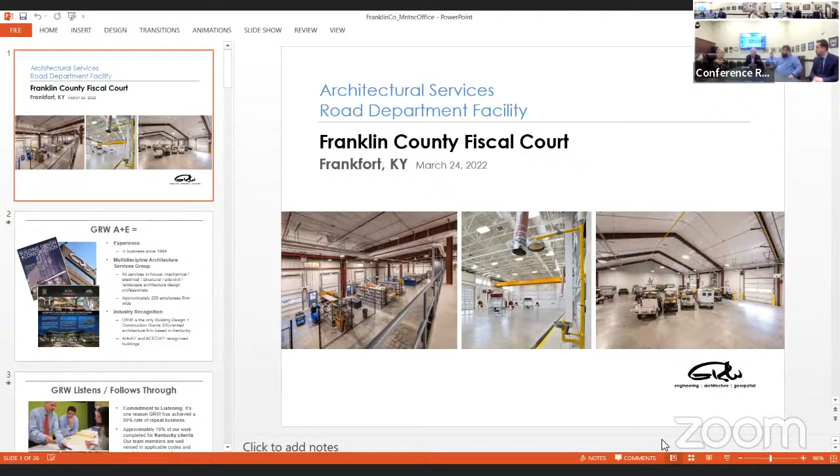I was wondering about that. Since that time, I guess they started out with about 5 staff members, and since then we have grown into a company of over 200 folks, with right around 100 people at the Lexington office at this time. I joined the firm in 2006, and we've been growing the architecture department since then. As I indicated earlier, Tim is surveying, so we have all the engineering disciplines in-house: site civil, structural, mechanical, electrical, surveying.

We also have water resources, which is wastewater and water projects. We have a number of satellite offices, but Lexington is the main office.

Okay, so we now have it up, and this project is a new design of a new road department. What's unique about this, and I'm sure you're aware, but I'll say this for the public as well, is that it's designed, and then we all have a construction manager, but we'll also be having to operate out of the facilities as we're building new facilities on site. So the logistics is going to be part of the issue we're going to have to confront and work with during this time.

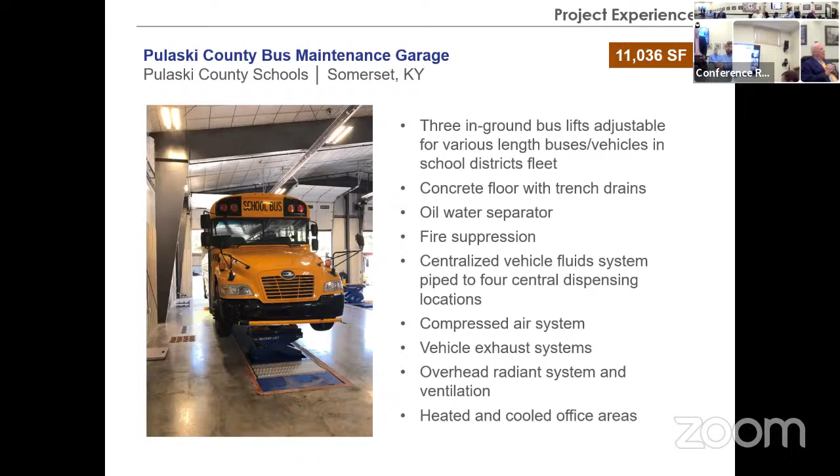Does this particular building have an administration building connected to it? I'll go to that slide, because I have the floor plan. This particular building had several storage rooms on the side, I think a tire room and a parts room. It had a work room where they were doing other tasks away from the buses. You had a waiting area for the bus drivers bringing the bus, and then an office and a restroom.

And then some of the equipment was coming from their existing facility, like the waste oil tank. So we were also coordinating existing equipment that needed to come to the building. The reason I put this slide in the presentation is I just wanted to talk about how we coordinate the drainage of the slab inside the work area.

Our goal was, one, you want to keep water away from the pits where the bus lifts are, so we want to drain away from those. And we have to be level enough that the bus gets onto the lift properly, so it's not too much of a slope. And then we want to minimize the linear feet of trench drain.

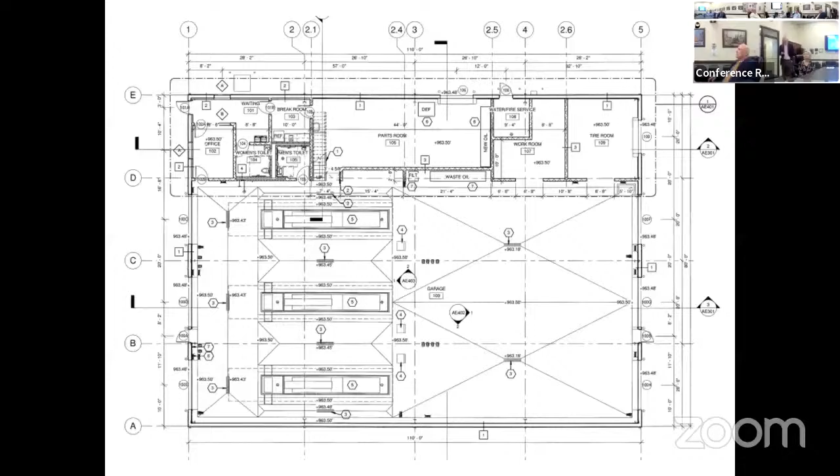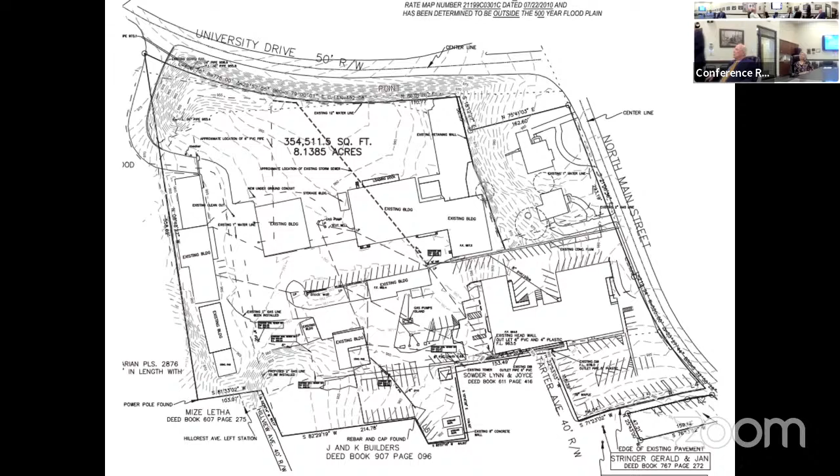So I had these site plans in there. This was the site when we received it. You have multiple buildings. This was their board administration building. But basically, they got this site from the local electric co-op that moved to another facility, and they bought this.

And so all these buildings were existing. They were interested in saving these buildings for their maintenance facilities, storage and distribution. They're interested in using this building as their board building and staff offices. And so we were given roughly this area of the site. So you had several buildings, you had existing tanks, and that was kind of the starting point of the survey.

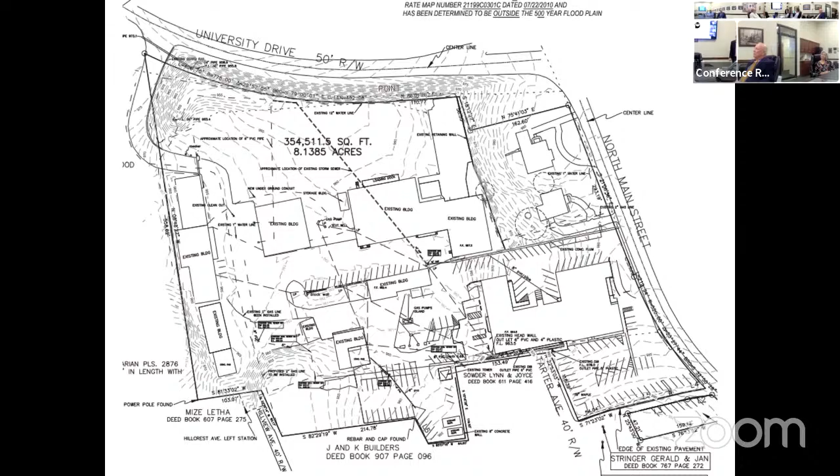So what we ended up proposing was putting it here. You're seeing where we are patching, repairing, or blacktopping areas that are currently gravel or need to be repaired in gravel. And then we packaged an alternate for the bus parking lot, which was gravel at the time, for this area, because they wanted to make sure that their bids came in so they at least got a project where they got the building.

So there, in one of the bays of this existing back building, was an existing wash bay. So we did not have to include a wash bay in our building or in our design.

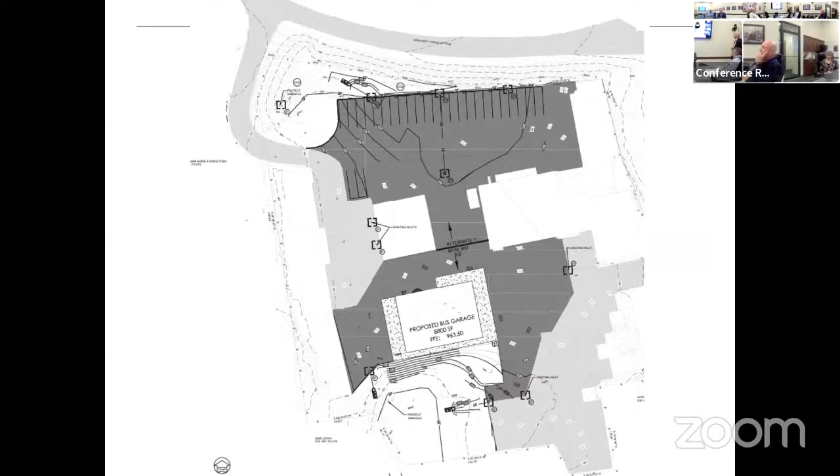Do you have a slide that shows those lifts with nothing on them? Do they go down into the floor? They are flush with the floor, except for one of the axles to make sure the bus is in the right position. It rolls into some cups that recess into the slab.

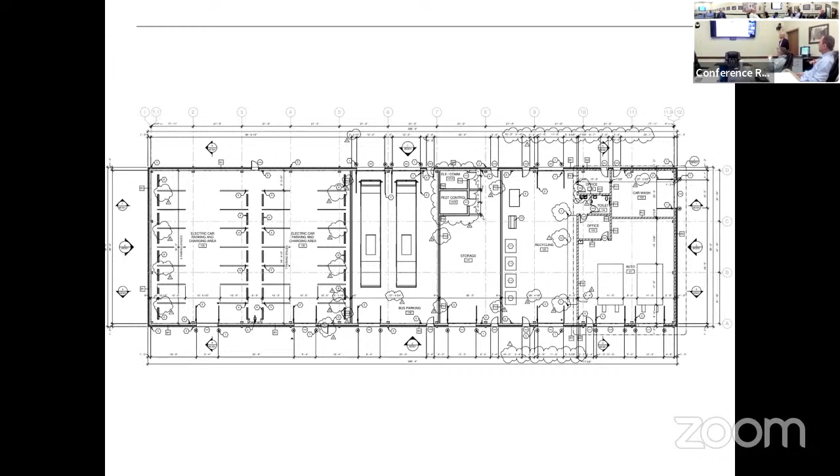They don't really maintenance them in there, but that's where they park. They have their fleet maintenance area here, and we coordinated the installation, or the reinstallation, of their existing lifts there. They do have a car wash for their campus vehicles, storage, and then this area is dedicated all to recycling — there's a compactor and a shredder. So that's how that building lays out.

One of the key envelope issues on these types of buildings is the R value of the overhead doors and the seals around the overhead doors. So we work very consciously when we spec those, when we draw the jamb and head details, to make sure we're getting good seals and a door with a good R value, because it's a major part of your envelope on these types of buildings.

Do you use fans in these types of buildings to move heat? It ended up being high volume, low velocity, or 'big ass fans,' that were utilized in this space. But you don't have to use the big foil fans like that.

You can also use something that's just for air circulation that are very small and kind of disappear. There were some areas we used those, called Air Pears. You get the same effect where it circulates the air, but they don't get in the way of what might be up in your ceiling. You all look at that as part of your design, how to circulate air.

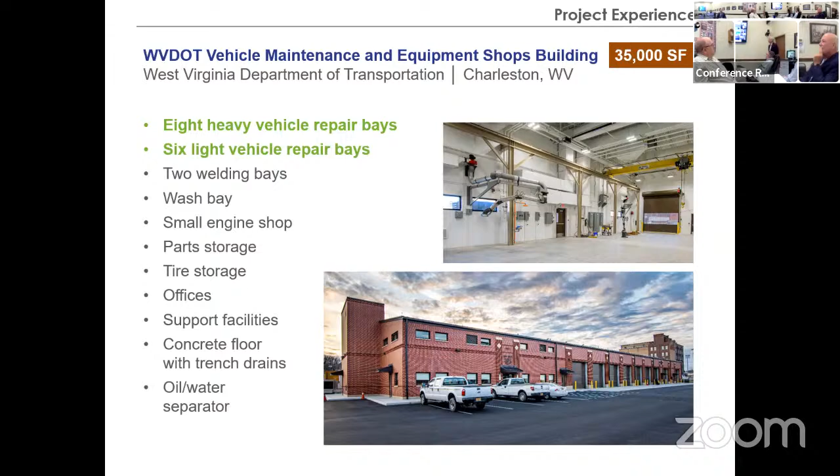And then this field maintenance shop for Army Guard and Reserves - you can see the hose reels for the exhaust system where they take them to the exhaust pipe.

This is your POL delivery system, your lubricants and other fluids. So you have cubes that are in an area by themselves. We have a trench system where the piping comes throughout the building - you can access the pipe to maintain it. It comes to these stations, and there's a reel for each liquid you're using. I think there's also waste, so it will take the waste back to a holding tank. So if you want that type of system in your building, we have designed that.

Does that trench also incorporate floor drainage? No, that is just for the POL system.

This particular project, they were pretty adamant about trench drains at the doors.

When you design these type of structures, do you put skylights in? Is that not useful? We have done it. Usually the reason we do a skylight is on a treatment plant, and they want to be able to remove a large tank or a large piece of equipment to maintenance it in the future. So they can take the skylight off, set it over, and crane that out.

This is an example of a small municipality where we needed to hit a very tight budget for a volunteer fire station. If you don't mind, one thing we haven't talked about, and several people on the screen have asked in other interviews, is about the flooring - what do you put down for non-skid, slippery floors?

Well, there's a fine line there between cleanability and non-slip. I know that Robert mentioned epoxy - being architects that support water resources engineers on water and wastewater plants, we are very familiar with the different epoxies. We typically specify around 3 manufacturers, and you can put additives in those for non-slip or slip resistance. Then you can finish your slab with the large trowel machines and get your control joints cut properly, and come back and finish the surface when all of the dirty work is done with the epoxy.

Typically, when we're specifying flooring or paint or floor coatings, we are going to meet the requirements of slip resistance put out there by folks like the ADA and other periodicals that we have. Are there techniques other than adding an aggregate or chemical applications? Well, there are ways - John, you can chime in if you know of anything I'm leaving out - but there are multiple ways to do it.

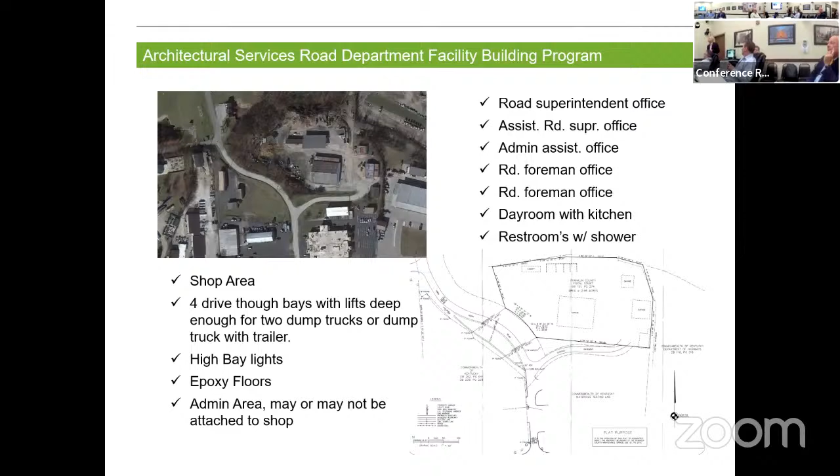So we had put this in with our proposal. I know that the goal for you all is to get under construction and get the project done as quickly as possible. And I think you will not find a better team that can do that, just because we have all the in-house engineering, we have in-house surveying, we have special inspections lined up that could also do geotech. So I don't know.

That this was set up to, I guess, beginning of March. Obviously, we're not going to begin at the beginning of March, but this was just a draft of what we thought.

So 3 months from schematic design to bidding. Is that accurate? If we get all the decisions made in a timely manner as we go through the project. And then I see 3 owner review periods.

Are you giving us what, a week, 10 days on that? That looks like about a week. Okay, yeah, 10 days, but sometimes there's weekends and whatnot. Sure, I mean, we would adjust it to specifically when the project started and how much time you thought you would need and physically need.

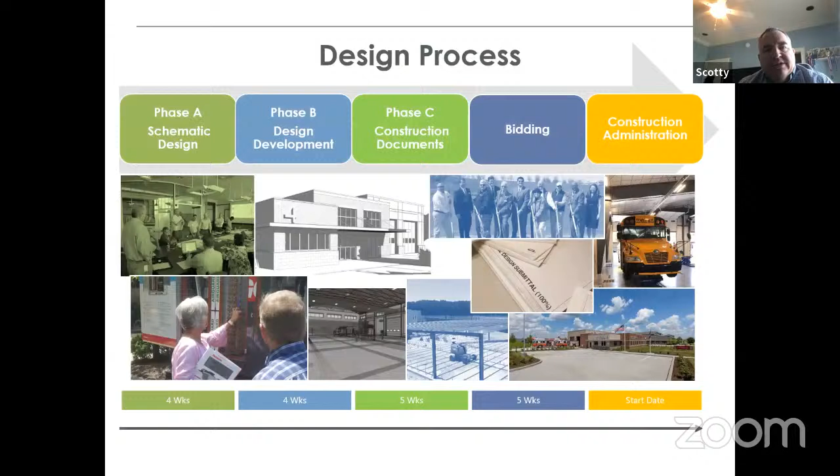Okay, will you explain your billing percentages and the process for the architect fee? Yes, sir.

Typically it is 20% of the fee for schematic design. Are you talking about the breakdown of the fee or actual percentage of fee? Yeah, the breakdown of it and your billing cycles per se.

So we would typically bill monthly. We do have some contracts where the owner wants us to bill at each stage of design, like schematic design, design development, construction documents. Typically it's 20% for SD, schematic design, 20% for DD, design development, and then 35 or 40% for construction documents, 5% for bidding, and the rest for construction administration. But we can set it, we're not locked in.

We're flexible as far as what - we work from many percentage of construction cost fee schedules. Kentucky Department of Education has one, the State Division of Engineering has one. For Berea, we work off of the KDE fee schedule. There's a rural development fee schedule we're doing a project on right now. So we can share those percentage fee schedules with you. Typically those include basic architecture and engineering.

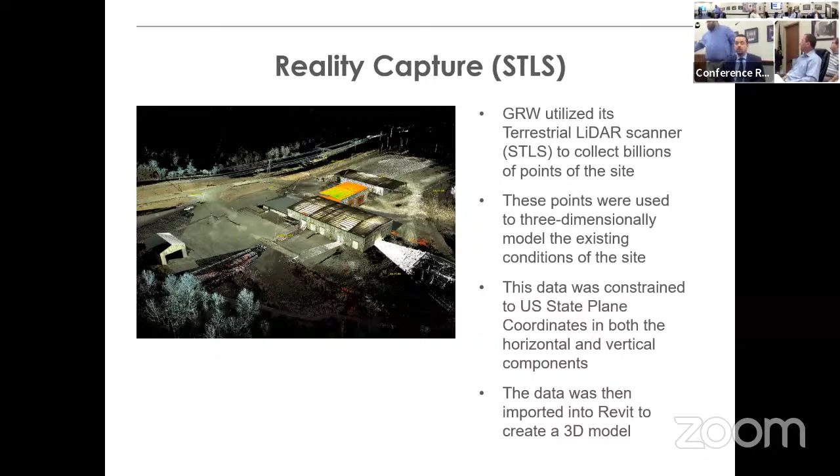One more question—those overhead cranes, do they run as much as the floor lifts, or more?

They're probably more by the time you add in the structural support that you need. I noticed in that picture, they had one on rails.

Thank you. Could I get my USB for this? You guys have a great day. Thank you so much, great, good to see you. Good to see you again. Thank you, sir. Good to meet you again. Good to see you again.

Thank you, Judge. Appreciate it. Good job. Appreciate it.

Andrew, you can go. Well, no, you might as well hang on. Cut everything off. Thanks, okay, I've got to go back to my office because we're still live. Yeah, go ahead, cut it off.

I hope you all are okay, but after yesterday's conversation, we just kind of sat around and said, man, this is going to really push it. And it also coincides with the CM. We can get the CM done around the same time, the same court meeting. So maybe next week, do you want to come back and meet for about an hour and discuss the three firms?